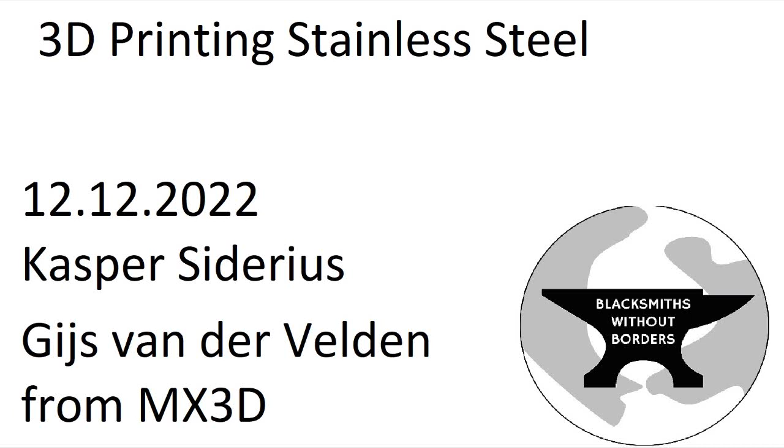I will briefly introduce myself, and after I will talk a little bit about MX3D as a company. First of all, why it is that we exist as a company, and how did that come to be. Then a bit about where we came from, then specifically about a couple of projects we have done in the past couple of years, amongst which the bridge that you already mentioned. And afterwards, I will go into a little bit where we are now as a company and where it is that we feel we are going towards.

So yeah, I'm Kasper. I've been with the company for about 8 years now, since the time that we were still part of an Amsterdam-based design studio. Within the company, I take care of a lot of incoming requests from clients who would like us to produce something for them, and I help them align their needs with what we can offer. Besides that, I take care of the general production planning to make sure that once we get these projects in, we actually deliver them in time and in the way that was agreed upon with the clients.

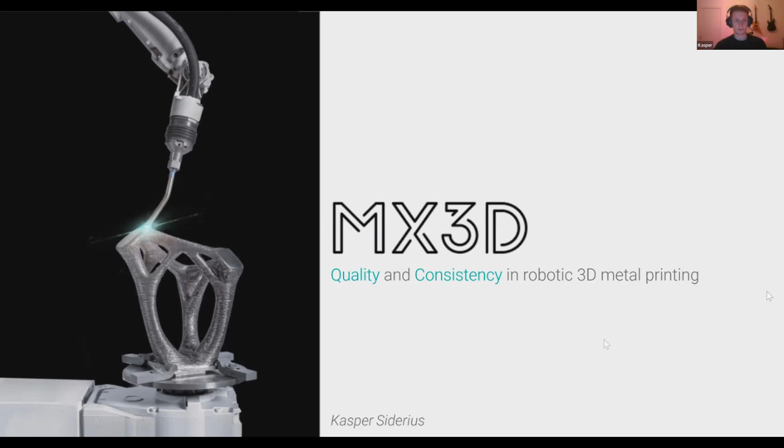So we, as a company, originate from a design studio based in Amsterdam, which was founded by a designer called Joris Laarman. He became famous, amongst some other designs, with this design here that we see, which is called the bone chair, and this is something that he produced around 2004.

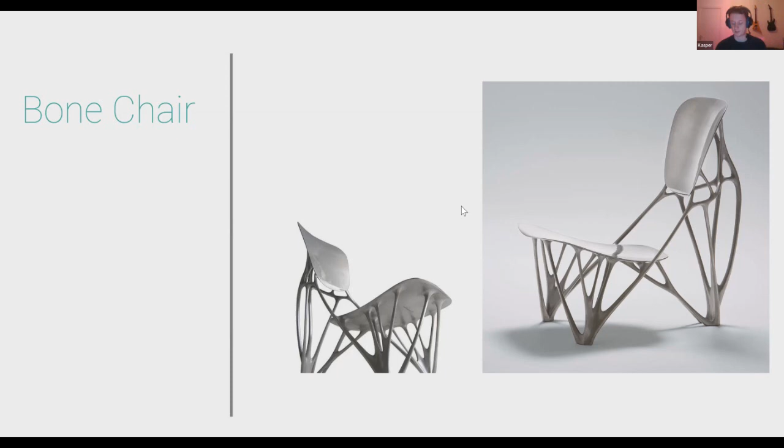And that's an iterative process, meaning we have many of these versions, keeps reducing material until finally at a certain point it breaks. That's when you know you need to take one step back, and that will be the finalized design. It's called the bone chair because that algorithm is basically also how our bones are structured - they are not solid objects, they are very porous with a higher density of material in places that need to withstand more impact.

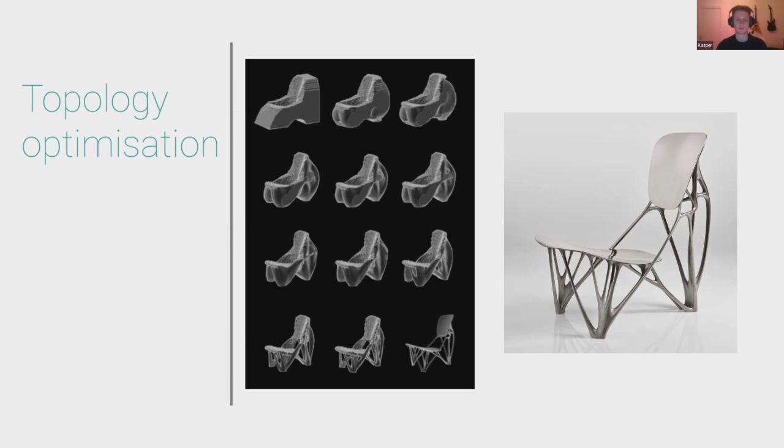Back in that time, in 2004, that was a very long-winded process. We see here a selection - these are not all the iterations that the algorithm went through. It took about a day for each new iteration of design, so to generate ultimately this final shape took weeks. Today it can be done in the cloud, and you can have your results within a few hours or a day, but back then that was something very, very special.

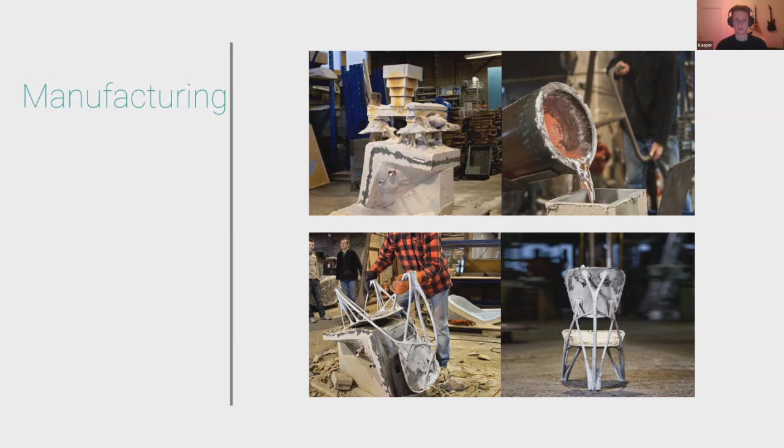Then, well, this is something you probably know a lot more about than I do, but the process then was to build a very complex mold in which a highly skilled metal worker would pour the molten aluminium in this case. This mold could maybe, if we were lucky, be reused about 2 times until we had to manufacture another one. So this was a very complex process, but also a high risk of something going wrong during the pouring process, to create this relatively complex shape.

Welded in such a way that it eventually appears like there was never any seam to begin with. Another downside of this process is the highly toxic material, which is very expensive to produce that way. So chairs like these, I'm not aware of the exact production costs, but safe to say they were not a mass market product.

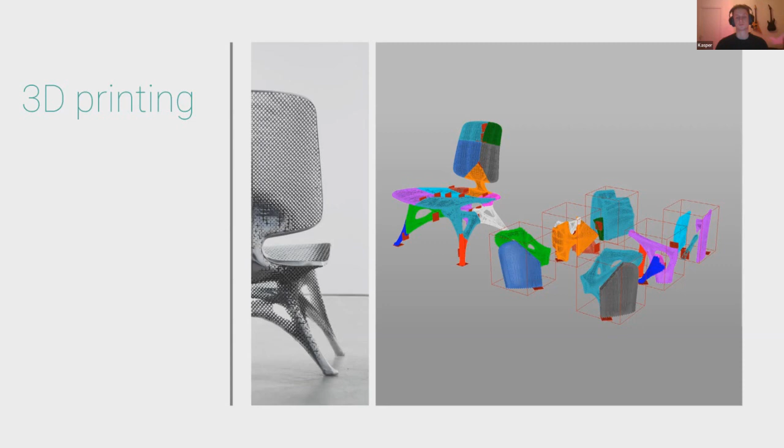They were something fit for a museum or very wealthy collectors. So from these initial trials into 3D printing, eventually the idea came: why don't we try to get one of these companies that produce these 3D printers to build a much bigger machine that allows us to 3D print something the size of a table or a piece of furniture in one go. Unfortunately, these companies were not so interested in doing that, because those are also highly specialized processes that don't easily scale up.

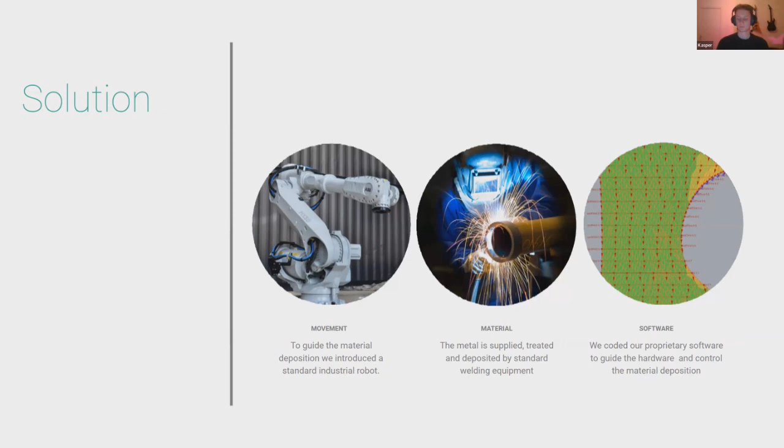So the idea was born to take it into our own hands and use robot arms from, for example, the car industry or the dairy industry, and connect that to off-the-shelf welding equipment. Two products that already existed, tied together with software that we created ourselves, allowing us to steer these robots and welding machines and start to 3D print structures with that.

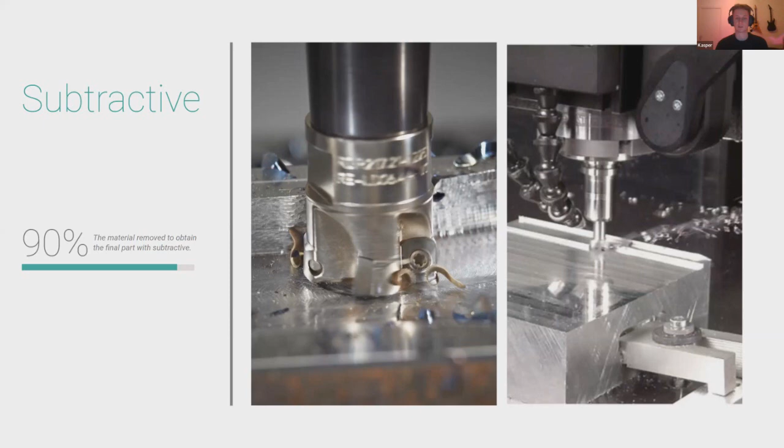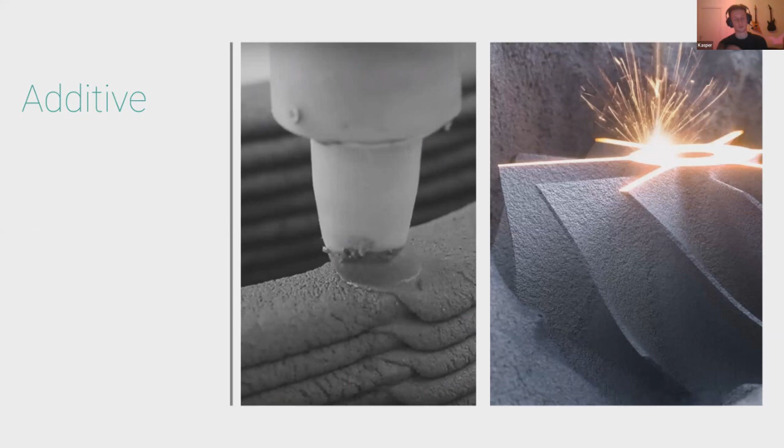A little bit of a sidestep here, but in general, if you take subtractive and additive manufacturing as two opposing methods of production, when milling you often get high percentages of waste material, whereas with 3D printing, the material you put in is normally very close to the amount you actually need in your final structure. In other words, it's what we call near net shape printing, so you're very close to your final tolerance shape after production.

And well, that's how we got started. This is what our setups look like. We have the 6-axis robot here, so 6 axes of freedom, meaning it can rotate here, here, here, here, here, and here. This is the welding torch, connected through this hose package to the power source, to the welding machine, with shielding gas protecting the welding process locally.

This setup is not how we started, but currently we have a couple of these setups in our workshop, which is what we call an external axis. So this thing can tilt and rotate. It's a system called infinite turn, so it can keep spinning around, and that allows for shapes with a more complex geometry.

Basically, our limitation for a normal 6-axis robot is an overhang of about 45 degrees. In other words, if something is leaning a certain way, there's a limit to what we can do. But with this external manipulator, we can rotate the piece entirely and reach overhangs of up to 90 degrees. The process, as it has become known, is called WAAM, wire arc additive manufacturing.

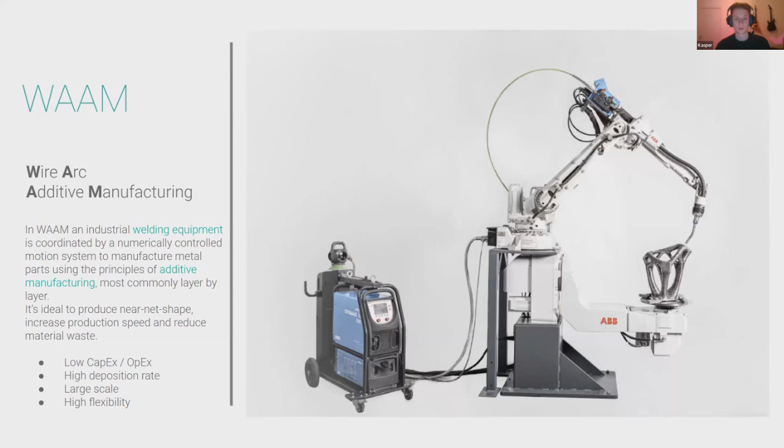Yeah, these were our... I mean, this picture looks really clean and fancy, but our beginnings were actually quite humble. We had a little side room in the laboratory, as he called it, of Joris Laarman, where eventually we had 2 robot setups with which we started to print these structures you see here in the background. He called them dragon benches, and they were made in many different pieces, as you can see here on screen and in this assembly.

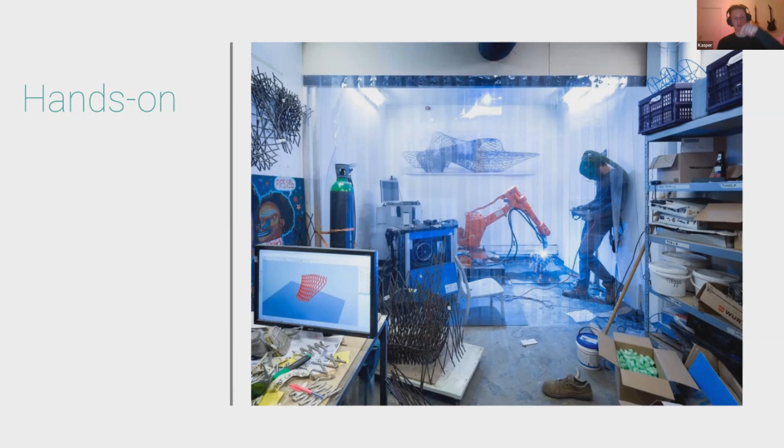Made by basically stacking welding dots on top of each other. A lot of the projects we do nowadays are made by printing lines on top of each other, or even printing solid shapes. But these initial, basically rods, were a lot easier for us to produce.

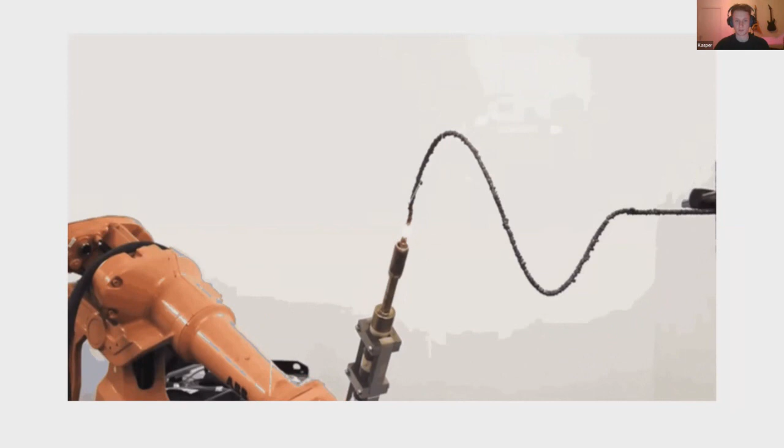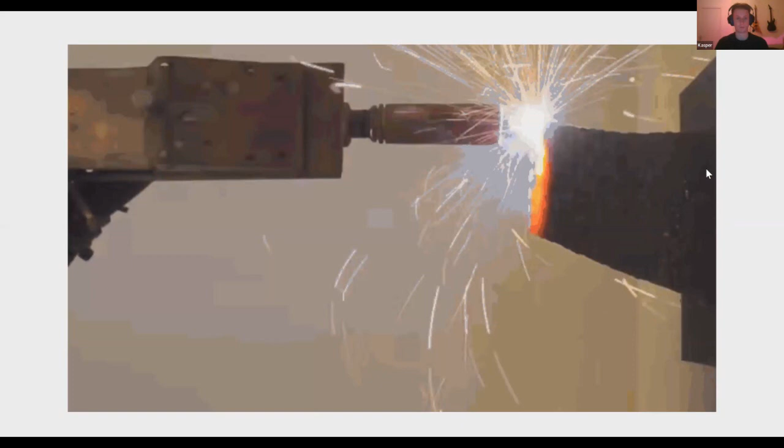So this is what those first experiments looked like, and we were trying to utilize the most of these 6 axes of the robot to achieve that. I see a question from Mariano, asking whether the base is 2 or 3 axes of movement. That is a 2-axis movement, so it can tilt to the side, swivel basically, and rotate. So then we have a total of 8 axes in a setup like that.

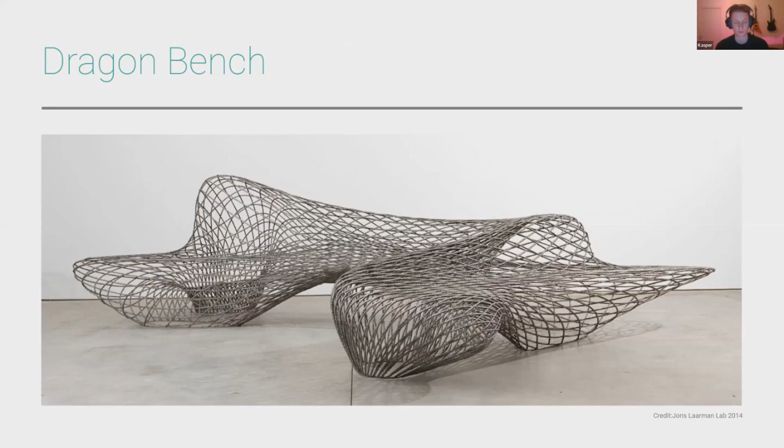So this is what those initial productions looked like when finally assembled. We produced about 7 or 8 of them, and they were distributed to various museums around the world.

After that, we were looking for a way to showcase this technology, which by that time, having gained some experience with it, we were very enthusiastic about, way beyond the initial idea of printing furniture pieces. Our thought was, what can we produce next that will bring this technology into the hands of people or into a public space, not just in a museum or a collector's house, but something that can immediately convince people this is a technology that works and is actually safe to use. We were invited by a software company called Autodesk to brainstorm about this, and that's how we came up with the idea to 3D print a bridge.

The reason for that is that it's an infrastructural object, so it has public utility. There's no requirement to buy a ticket to see it. Everybody can see it and can also properly touch it. That's the first reaction a lot of people have when they see pieces we produced in our workshop - they want to feel the texture of the material, they want to touch it. So to bring that into people's hands, and at the same time, if you see a 3D printed bridge that is actually in use in a city, then intuitively everybody can understand that this technology is safe, because otherwise we would never be allowed to place it.

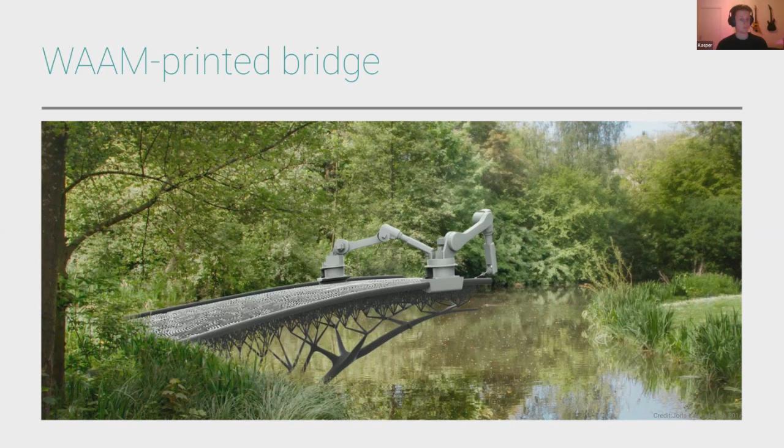We found a good partner in the municipality of Amsterdam that would actually allow us to go through with something ultimately quite experimental. After we got those first partners on board, we ended up having a lot more partners, either from the welding industry to help us figure out how to step up our game in producing structurally sound structures, but also, for example, from Imperial College London, which was very interested in researching this new material, and helping us together with Arup, an engineering firm, to ensure that what we were producing was actually safe and good for people to walk over.

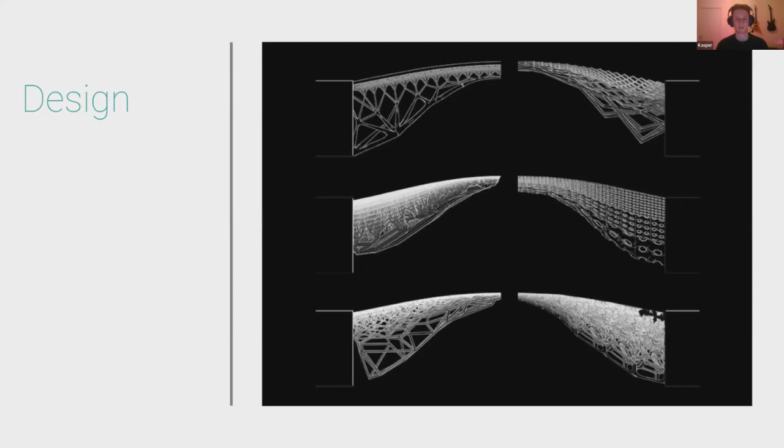We had many initial design iterations, which were eventually reduced to a simpler design, because if this is the canal in section, there was a risk that a boat might, for example, break off one of the limbs. For the engineering firm backing us, it was really complex to go through all the calculation scenarios in which one of these members would break but the rest would remain intact - how safe is the structure if a part of it breaks. You get to an almost infinite amount of scenarios that have to be calculated, so that was a very complex thing.

So we were sort of requested to simplify the design in that sense. As you can see here, if these are the 2 canal walls, the profile, which is open for the boats to go through, is completely open here. It's really only resting on 2 sides of the canal walls.

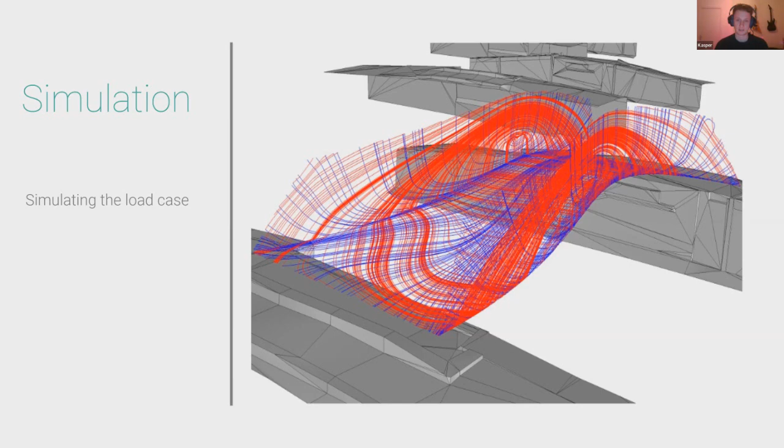Together with the designer, Joris Laarman, who by this time we were a separate company from his studio, but he was still very much involved with a lot of the work we were doing, together with Arup and the designer, it was decided it would be nice to reflect the tension and compression forces, shown here in red and blue, into the final design. You can see that here in the side of this handrail. If we look back at the structural analysis, those reinforcements, or emboldened versions of that design, actually have structural utility. And looking at the top view, this is just a decorative element in the bridge deck, but below this are the actual structural beams which follow this shape pattern, again based on this analysis.

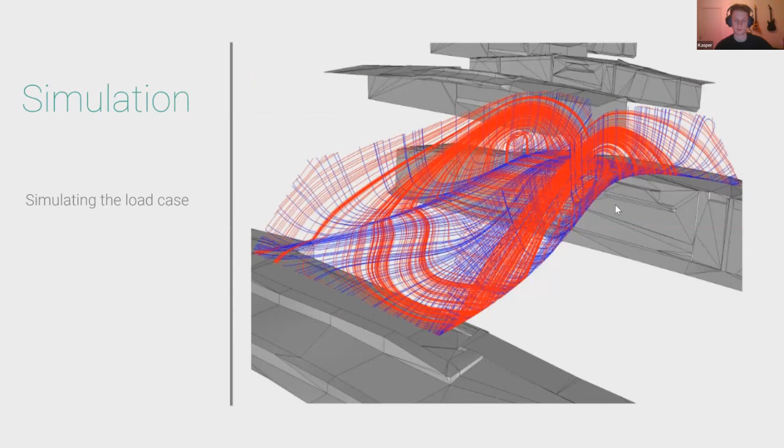Besides that, we decided to apply some elements which are both decorative and weight-saving, and some elements, the four swirls as we call them, on the outer ends, which are entirely decorative and meant to showcase the potential of 3D printing from the perspective of ornamentation - something that has not always been in demand in the past 100 years, especially in architecture, for a variety of reasons. We wanted to showcase that with 3D printing, there's a new option on the table for creating such decorative structures.

So we wanted to combine both the practical elements and the more artistic potential for this technology, and those were inputs for the final design.

As I mentioned, we needed to prove that this bridge was actually safe, and the initial steps were taken along with our partners at Imperial College. We 3D printed a whole bunch of tubes, cylinders, plate work, etc. They were happy to clad those with sensors and then ultimately destroy them. From those initial samples, they gained data, and that data they used to inform the full model of the bridge, to calculate how thick all of these elements would have to be.

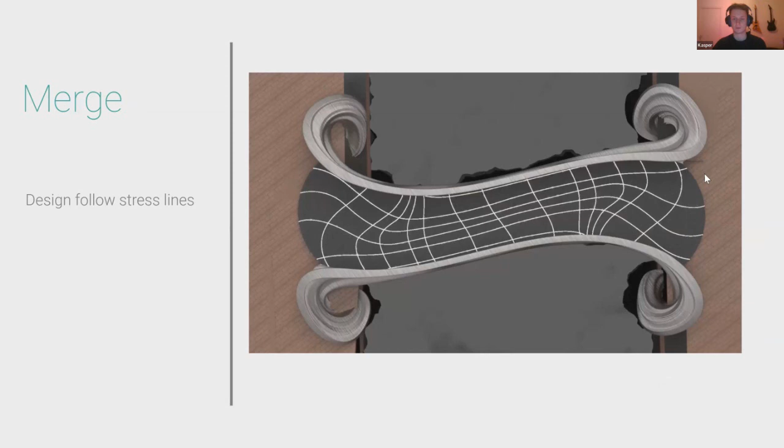For example, this bridge handrail, which is entirely hollow, has a different wall thickness than the structural elements below.

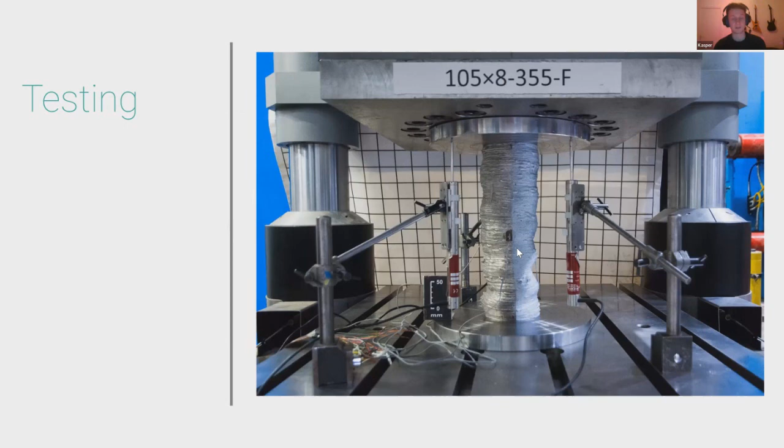That theory of saying okay, we take elements and we test those, and from that we derive values which we use to inform the final design, that has to be proven as well, right? Whether that's consistent. So after printing the first 2 meters, they came by our workshop to test on site an actual part of the bridge. And eventually they went on to also test the full version of the bridge.

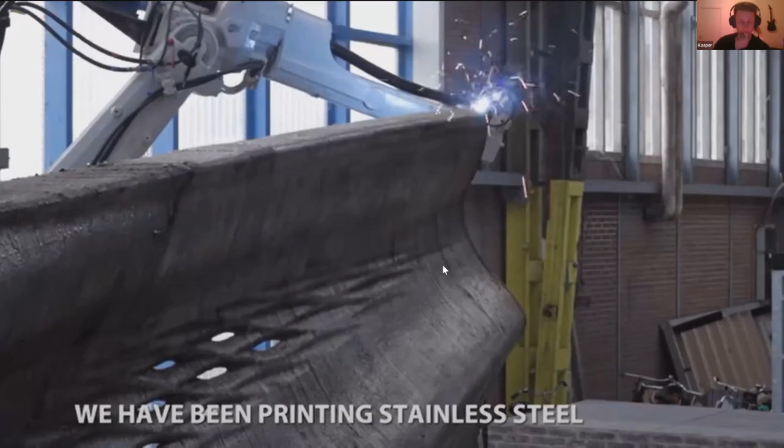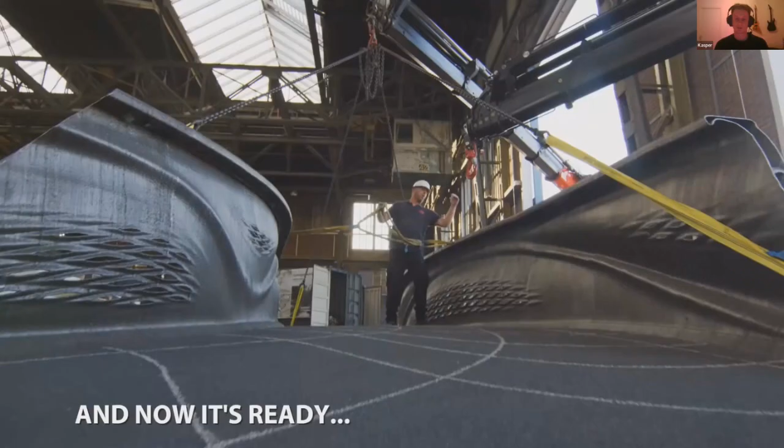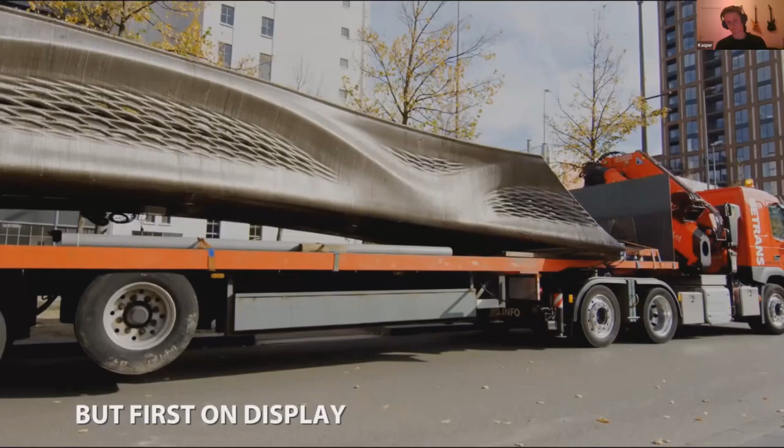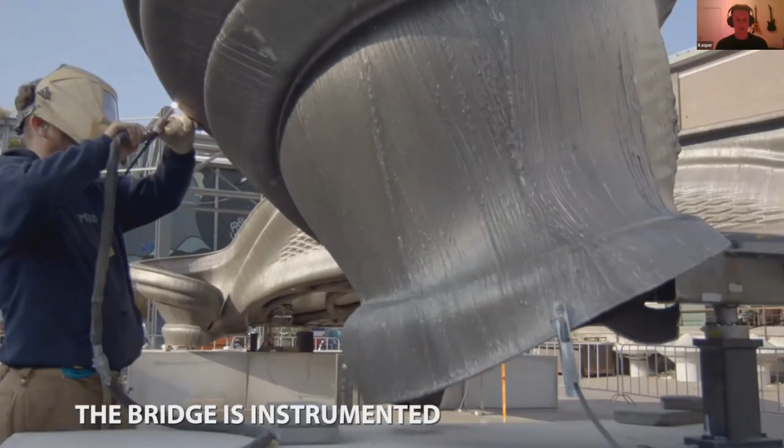This is a small video showing how we went from producing the full bridge to having that tested by Imperial College. This was all done in Amsterdam, with a lot of sensors being attached to this bridge, and finally showcasing it for the first time to the public in October of 2018, at a big Dutch design fair called Dutch Design Week. This was a very exciting moment for us, because it was actually the first time that the bridge was on display to the public, and also a good trial for that sensor network, which I will talk more about after this video.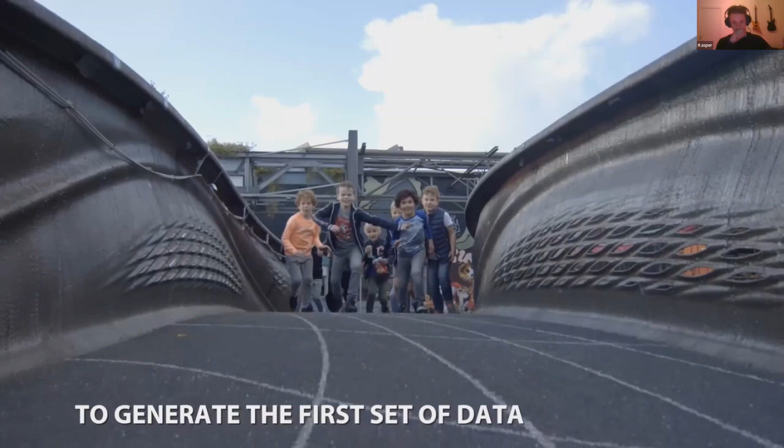As you can see, we weren't the only ones working on that project. This is what some tests at our location in Amsterdam North looked like. We had to actually apply a lot of weight on it to prove that it was strong enough. So here we had 8 concrete cylinders of 750 kilograms each, and 5 IBCs of 1,000 kilograms each.

Eventually, for the final test before placement in Amsterdam, we went up to a final load test of 22 tons. The reason the load it had to withstand is so high is that at that point it was a non-certified method of production. We had to prove that the bridge was able to withstand 1.5 times the required maximum load. So that's how we ended up testing it at 22 tons, which was actually quite challenging to come up with ways to keep stacking weight on this bridge.

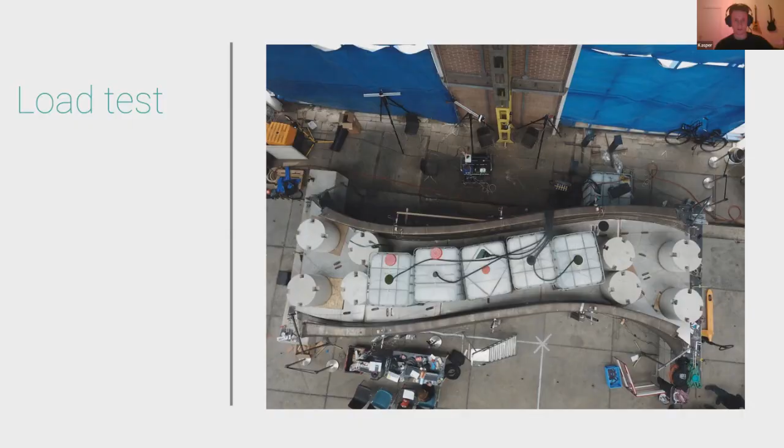Beneath the bridge deck there are a lot of sensors, and they are meant for two basic purposes. One is measuring that this material over time still behaves the same as it did when we initially tested it. In other words, you can prove that at one stage it is strong enough to withstand whatever loads it needs to carry, but how can you prove that 2, 3, 5 years down the line it still has those same capacities?

At the same time, it helps the city of Amsterdam monitor behavior on this bridge, which is interesting for them in a very crowded area where this bridge is placed, in the red light district in Amsterdam. For example, imagine that if on a Saturday you suddenly see that it's a lot more crowded at this bridge than normal, they could infer that in another location another route has been closed off, for example. In other words, with these smart structures, as they are called, it allows municipalities to get a better idea of how people flows in cities actually work, rather than approximating them in the planning stage.

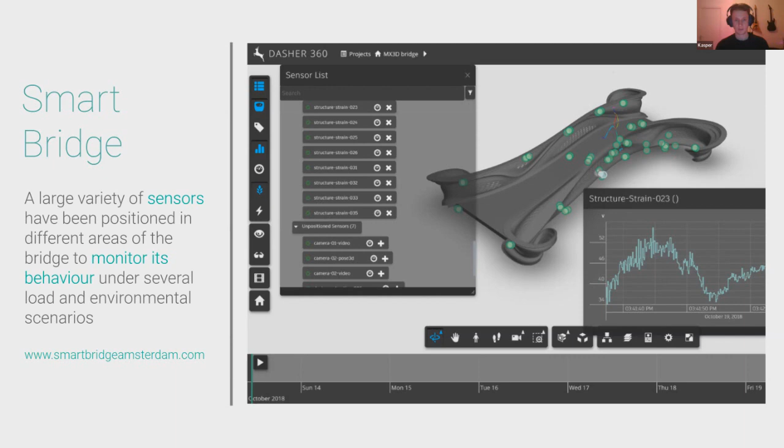Our initial idea was that if we, along with the municipality, selected a very narrow canal, we wouldn't have to do so much printing. But that turned out during the placement stage to be quite tricky, especially considering that about 500 meters from where the bridge was eventually placed, one of the old canal walls of the city had spontaneously collapsed a few months before placement, which meant we were no longer allowed to carry that bridge over any of the roads.

A lot of them were actually closed off. You can see here that the next bridge in line is already also closed off because of structural concerns to that bridge. So the only option we had was a route coming from the main IJ River.

The tricky part about that was not only the width of the canals, but also that our bridge from lowest point to tallest point measures about 1.77 meters. And the bridge you see in the picture on the left in the background has a free height profile of 1.80 meters. So we had to find some form of boat that would be able to lower itself to exactly water level to have a little bit of clearance. Luckily we found a transportation partner that had exactly that - a very narrow boat that was also able to go to water level.

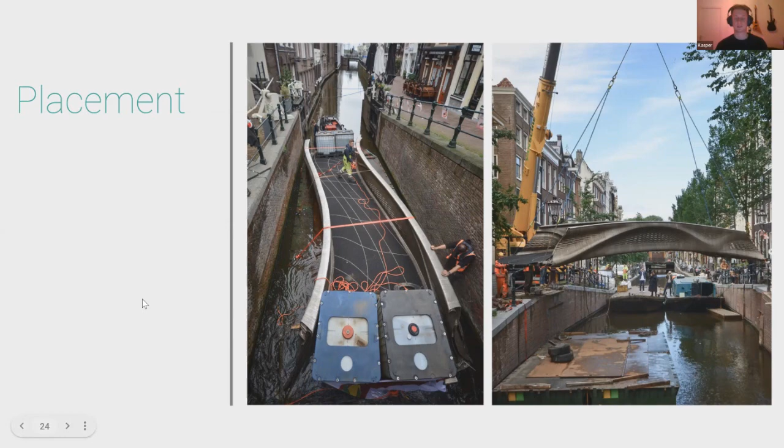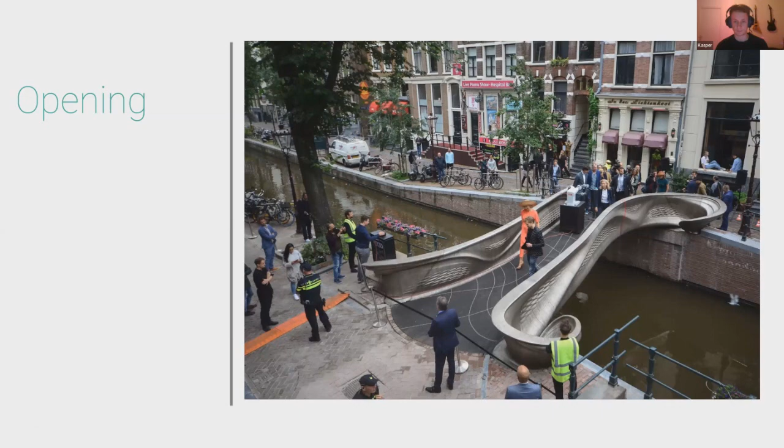Eventually we had one crane that was allowed to stand on this renovated canal wall, which lifted the bridge into place. And then we had the pleasure and honor of having the Queen of the Netherlands finally do the opening for us in the summer of last year.

We had the idea to have a little robot - normally from the medical industry, a helper robot they call it - to do the actual cutting of the ribbon. The Queen would press this button, and then the robot would grab the piece of rope and cut the ribbon.

What made that a bit of a nervous moment for one of the founders here on the right was that he had been told beforehand by one of the Queen's assistants that it was a very nice idea, but if the Queen presses a button like that in a public event, it must 100% work - otherwise it's not a good look. One of the main things we'd learned in working with robotics for 5 years is that there's never such a thing as 100% reliability. So it was a bit of a nerve-wracking moment, but everything thankfully went very well.

Well, maybe before I move on, I see that there's maybe another question.

About the metals we want to develop for printing - we basically work with standard off-the-shelf welding wires, so we can work with any range of steel, stainless steel, bronze, or aluminium alloys. With regards to development, that's usually informed by clients. If a client comes to us from, say, the oil and gas industry or the automotive industry, they all work with slightly different alloys and have their specific structural requirements. So normally we work closely with those partners to develop specific alloys to the degree we need to, and by now we have a library of materials with which we have some experience.

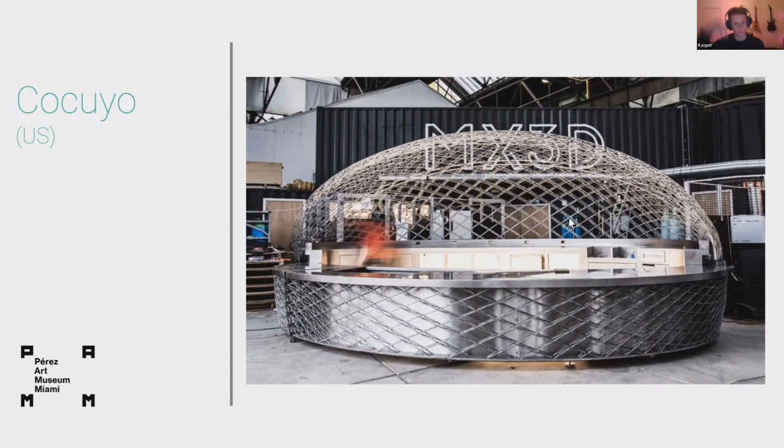This is a movable bar structure we produced for a museum in Miami, and you can see this is also produced using that same dot-by-dot printing strategy I was talking about in the beginning. We have a very good partnership with Takenaka, a Japanese engineering firm, for which we've produced a couple of pieces.

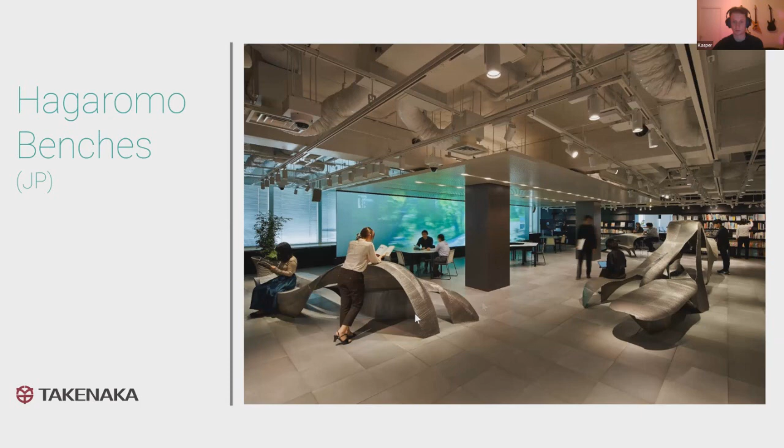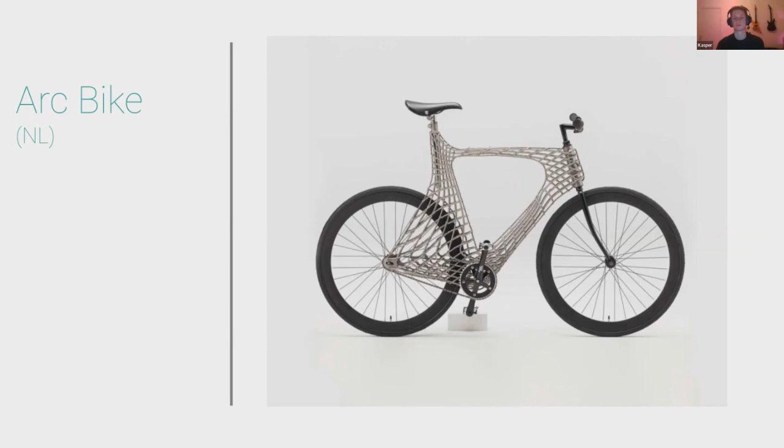Amongst those pieces are decorative multi-purpose benches in one of their meeting rooms, and a 3D printed bicycle in 2 versions, which were always interesting because we get a lot of positive feedback on it from people, but we've never been able to crack the business case for it - it doesn't financially seem to make a lot of sense to produce.

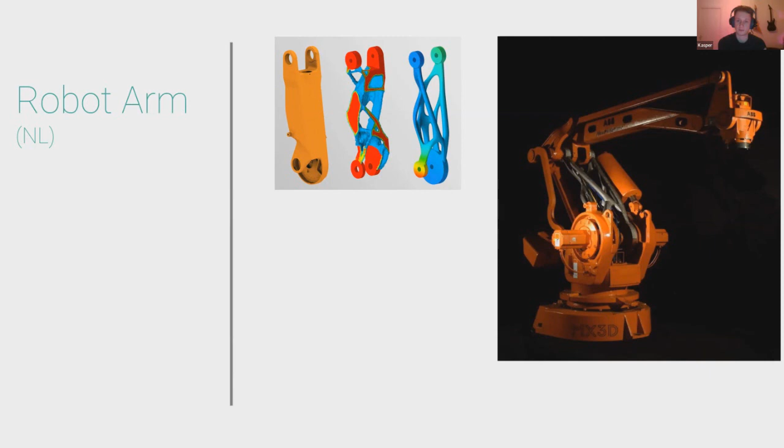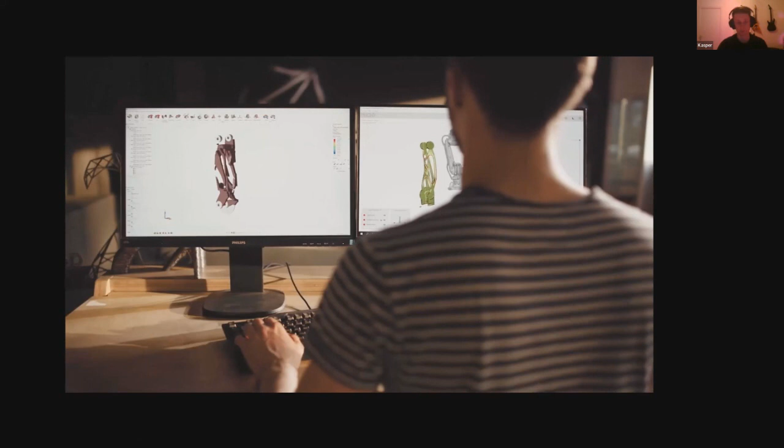One question we often get about 3D printing is, if you have a 3D printer, can you also make more 3D printers? We thought it would be funny to have these robots make their own spare parts. Here we can see it in action, because we eventually mounted it on a robot that's no longer in use. It was nice to see that it actually works, and that the tolerances after printing are as designed.

Always have to have the logo in there, of course. Apart from the oil and gas industry, for which we can see the benefit of having the external axis, this is the overhang angle I was talking about. We would never be able to produce this using a 6-axis robot—this really requires an 8-axis setup. This is a form of what we call hybrid printing, where the clamping areas on the side are pre-machined, and the robot prints between those.

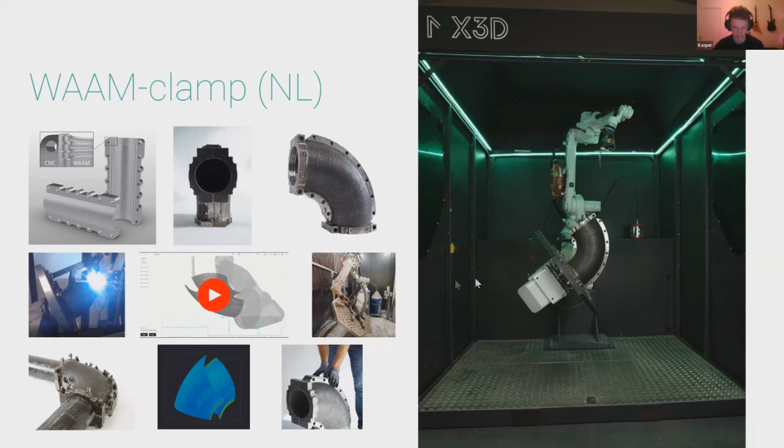This is a very interesting project that we did for Takenaka, which I'll get back to shortly.

Second iteration of the bike, which we printed in aluminium, because we got a lot of commentary on the first one that we printed in stainless steel—that was a very heavy bike, and people were absolutely right about that. A prototype for an elevator cart for Schindler.

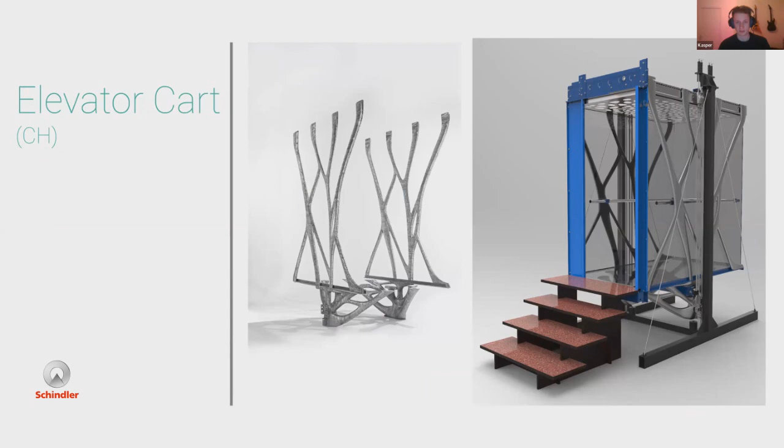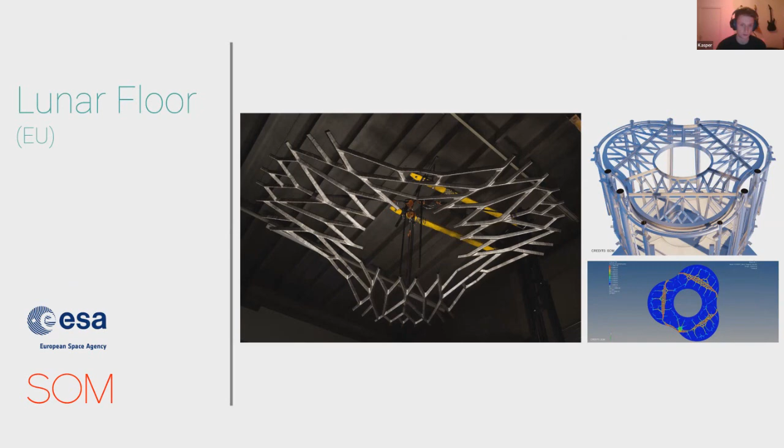This was another interesting one we did in collaboration with the European Space Agency. They wanted to showcase at the Venice Biennale 2020 a lunar pavilion, demonstrating how people could live for short periods, up to six months, on the moon. With anything you bring into space, the more weight you can reduce, the better, so these topology optimized structures are very beneficial for the space industry. We were asked to prepare this floor structure for them. Unfortunately, it was never actually showcased at the Venice Biennale because COVID threw a wrench in that planning, but it was still an interesting showcase and a very interesting client.

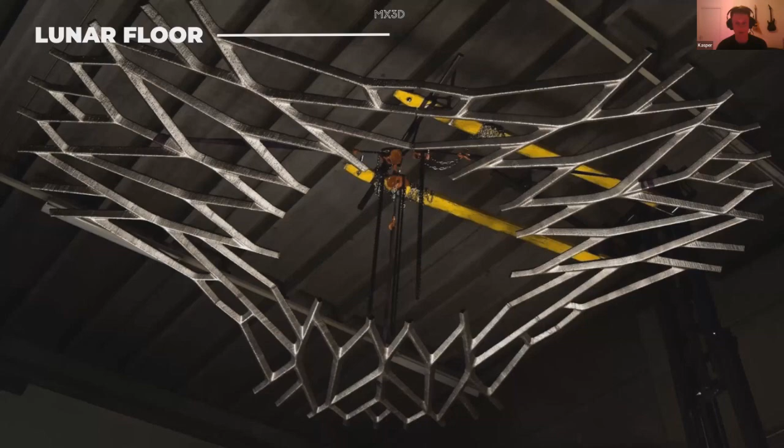A large art piece that we produced for an American artist, installed recently and opened just last month. A rocket thruster, another sample we produced internally as a showcase for these kinds of industries, for which we would normally not be allowed to publish. But if we generate something similar ourselves, there's not much blocking us from showcasing that.

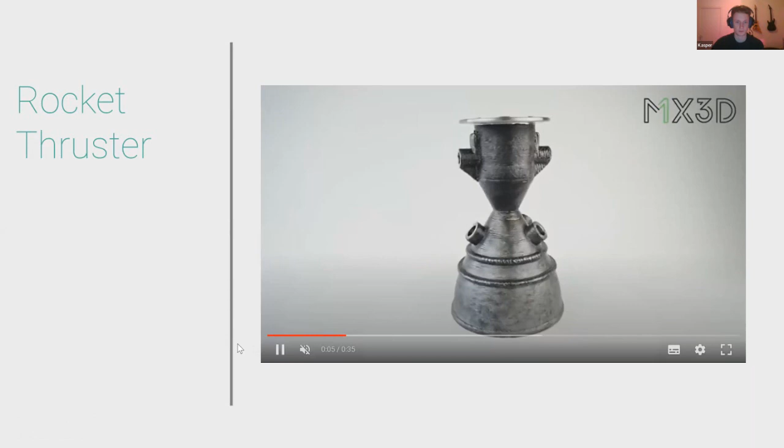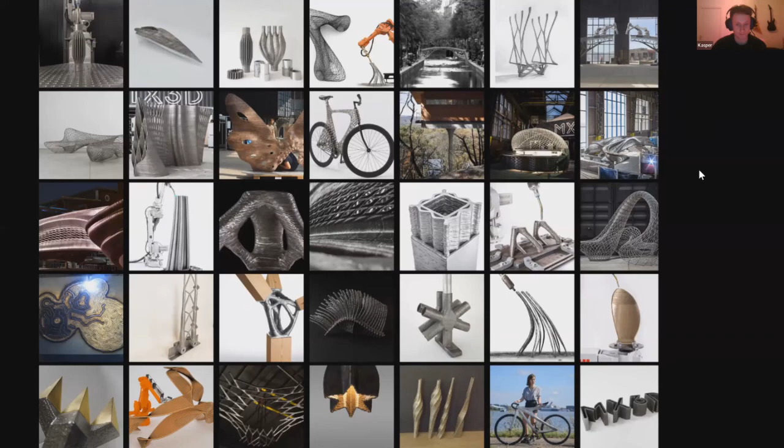Some more overview of parts, but I think by now you get the idea of the range of things that we can produce. As I'm probably running out of time a little, I'll go through the next bits of the presentation a bit quicker.

One of the things we really learned is that the way forward for us is not to keep reiterating the same testing trajectory we did for the bridge, which is to print a lot of samples, then print a final object, and then also have to test that final object. The key to a more straightforward path to success is to certify certain parts of our production process. This isn't easy, since it needs to encompass the whole process because of all the different printing strategies, alloys, and complex angles we can produce. But if we tackle those one by one, we eventually have a set of qualified and certified parameters.

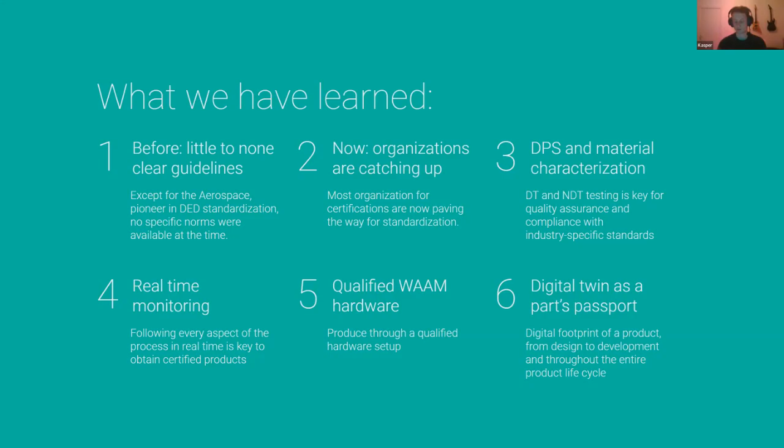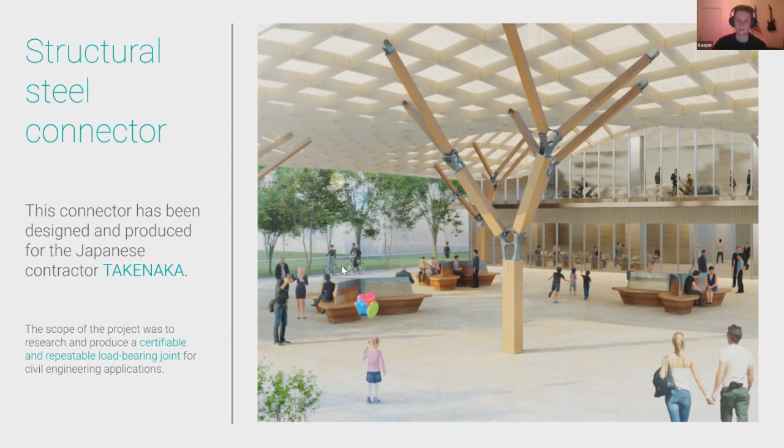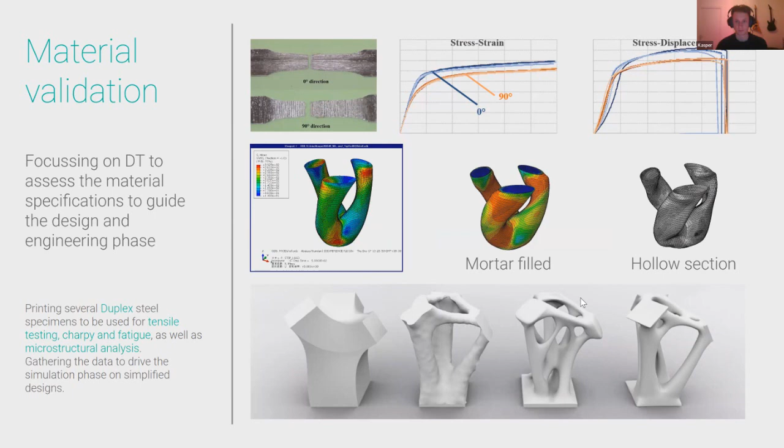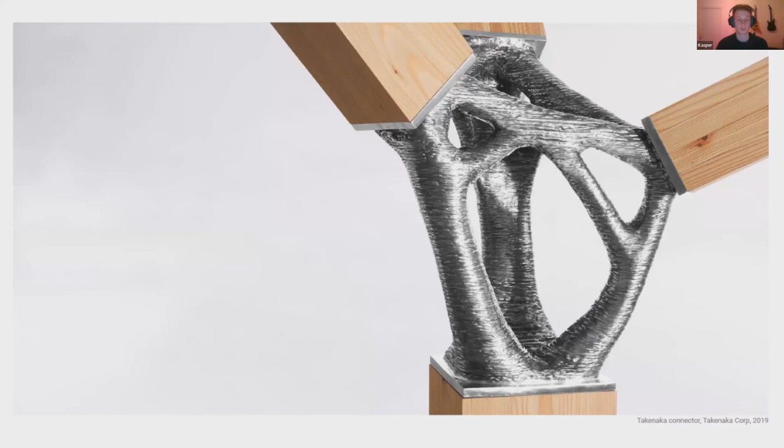So with them, we went through the whole trajectory of first printing a few samples and gathering the material data from those samples, then printing a couple of simplified objects which were non-destructively but also destructively tested. All that data was then used to produce repeatable and certified final, more complex node elements, which here you see the before and after of the initial samples, the simplified samples, and finally the final element installed. It never ended up in the actual architectural project, of which I'm not even sure if that was a real project or a fictional one for them to accommodate working with us on this trial. But both they and we considered it a very successful project.

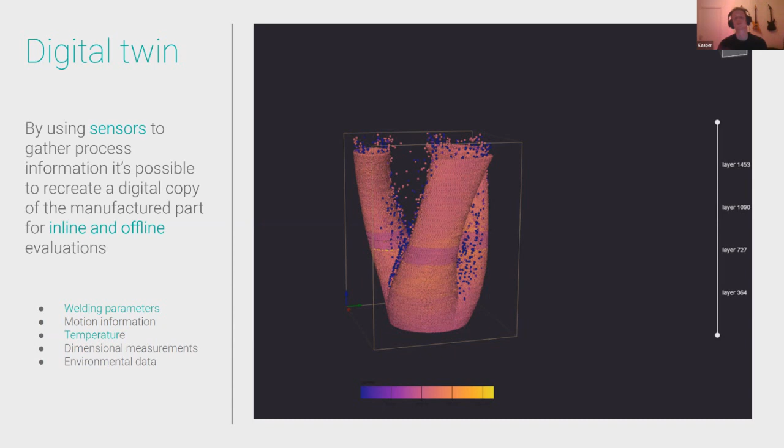This is a very important part of that trajectory as well, what we call the digital twin or digital passport. With a lot of prints, we measure all the data that goes into the print: heat monitoring, temperature data, current and voltage data, robot speed, humidity, air temperature. All those parameters combined into one digital twin of a part allows us to prove that a part is printed according to the same parameters that were certified before. In other words, we don't have to prove for every part time and time again that that specific part works. If we can prove it was made to the same manufacturing standards, that is enough for most industries.

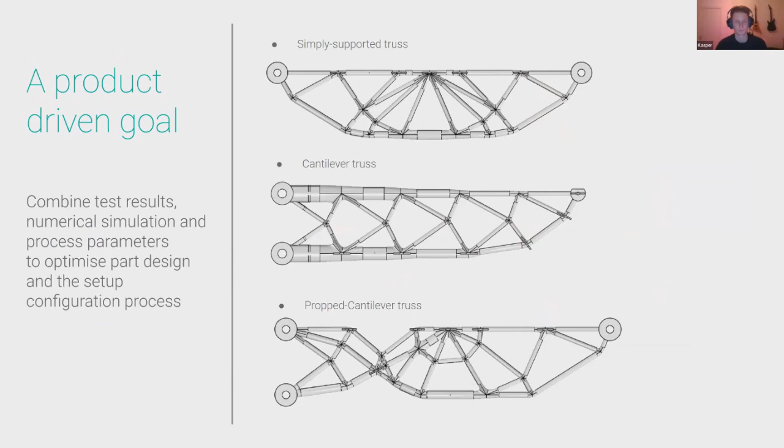Here we see another example of such a trajectory, in a European Union funded collaboration with a lot of different partner companies, in which we are taking structural elements that are, in this case, mostly about material reduction, printed and then finally tested.

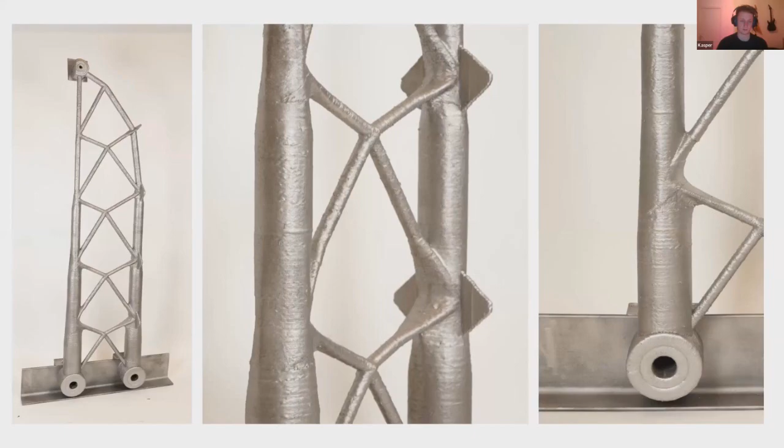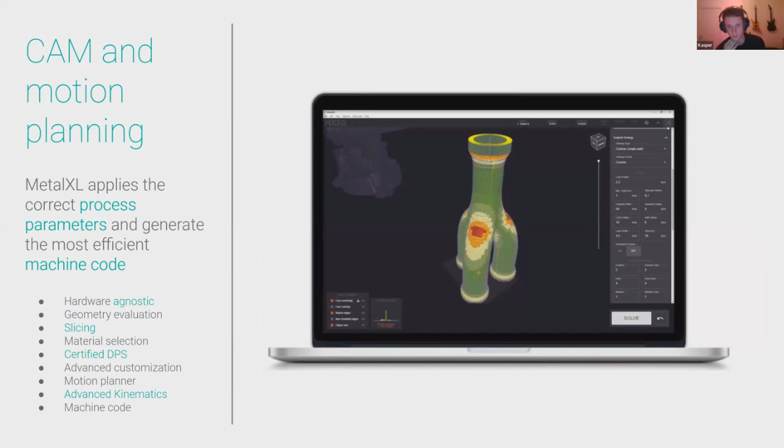On top of that, and this is the final part of my presentation, we develop our own software for the path planning and printing of all the parts. This encompasses material data, but also a lot of information about different strategies for printing. And we sell it to customers worldwide.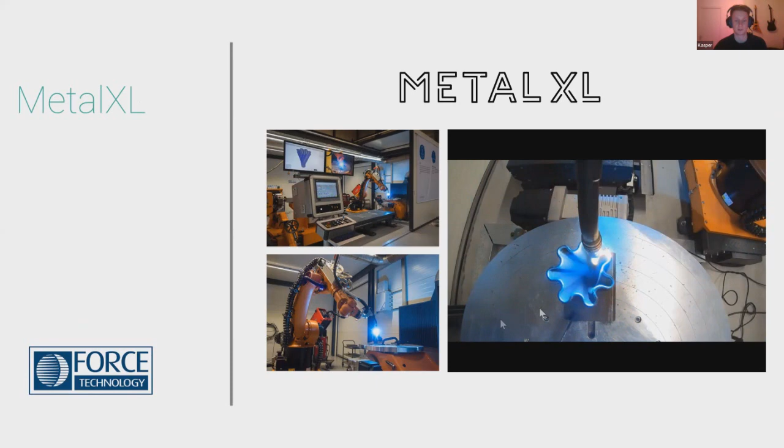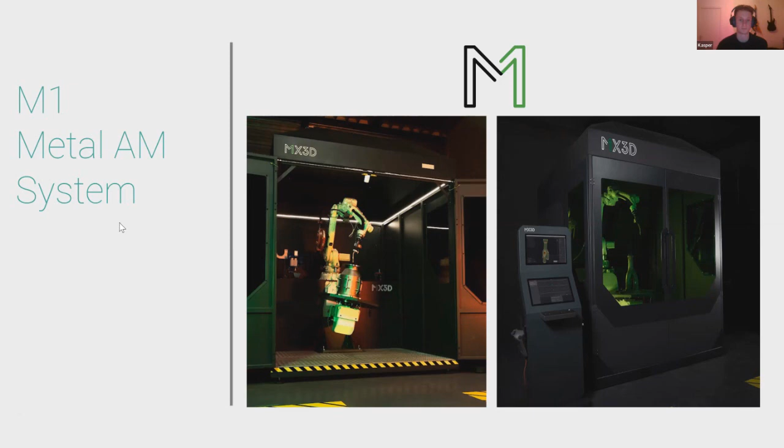This was one of the first, Force Technology in Denmark, to work with us on that. We sell this as a complete printing setup to clients worldwide, with units now on a couple of different continents, including Japan and Germany. That encompasses an 8-axis robotic setup and a monitoring station, which allows you to real-time monitor all of the data I mentioned before.

And that is our current status at MX3D. So thank you very much for your time and attention.

Wow. Thank you a lot for the presentation. This has been a fantastic and really interesting topic. I, and probably also many other people present, had never dug that deep into this before. Really cool what you are doing there. Maybe without further ado, we go into the questions. You already started to dig into them, but that's totally fine, normally we go through them one by one afterwards.

From Paul: is it possible to scan 3D historic statues and print them? Yeah, absolutely. We're working a lot with 3D scanning software, using existing parts and bringing them into our software.

Wow, okay, thank you. So we had already answered the questions about the 2 or 3 axes of movement, and printing you also talked about. So here are a couple of questions, I think, coming together, all from Mariano Garabato. Do you use an open source program to move the machine, or did you create one for this new system?